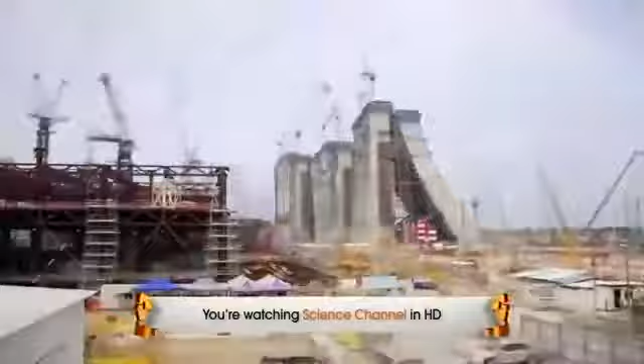Incredible feats of architecture. And right now, I'm going to take you behind the scenes of one of the largest construction projects in all of Asia. Singapore is reinventing itself. This small island nation is attempting to finish one of the most audacious buildings on the planet. It's the country's first casino, 3 skyscrapers covering 9 million square feet, and topped off by an engineering masterpiece, the first ever Sky Park.

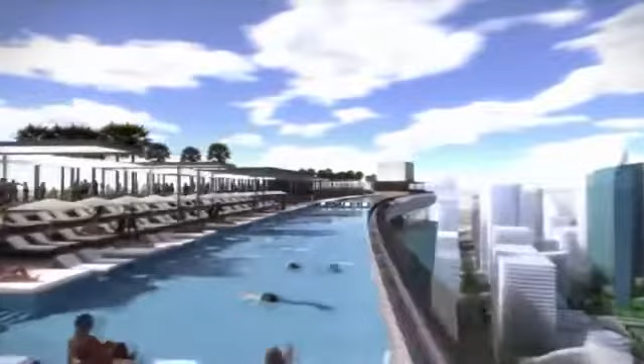Longer than 3 football fields, with gardens, swimming pools, and restaurants, all higher than the Seattle Space Needle. We're actually in the pool right now. We're in the pool. This is the view from the pool. Wow. It's pretty spectacular. That is amazing.

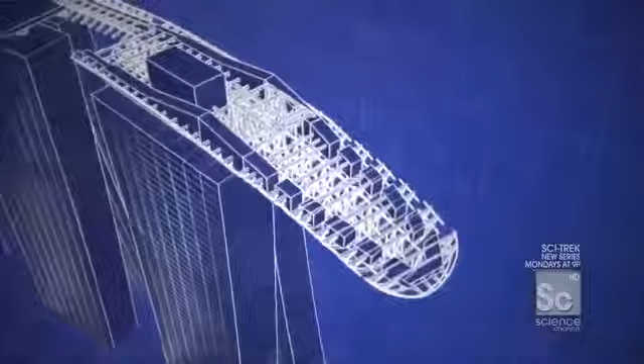To finish it, crews must perform some of the highest and heaviest lifts ever attempted. I mean, you're putting a piece of steelwork the size of an aircraft carrier on top of 3 towers. Tackle one of the largest paint jobs on the planet. You would never do this in America. And erect one of the longest cantilevers in the world, 200 feet out over nothing. Oh my God, that's enormous.

I am in Singapore, a tiny island nation with less than 5 million residents. In fact, the entire country is smaller than all of New York City. Located at the southern tip of the Malay Peninsula in Southeast Asia, the main island of Singapore is both a city and a country, one of the most densely populated in the world.

Culturally speaking, it's a somewhat strict and buttoned-up environment. Chewing gum, against the law. Insensitive behavior is punishable by fine. And if you're caught vandalizing a building, you quite literally get hit with a stick. But despite this conservative cultural backdrop, Singapore is attempting to reinvent its image by doing something totally surprising. They're going to open a massive casino.

With no natural resources of its own, Singapore is risking $5.5 billion in hopes of cashing in on the gambling boom exploding across Asia. It's a pretty significant gamble because for Singapore, you've never had gaming before at this scale. You've never had a resort at this scale. Yes. You're taking a kind of a major leap. Yes, it's certainly a transformational project for Singapore. Where you hope to actually not just double, but triple the tourism receipts. That's big.

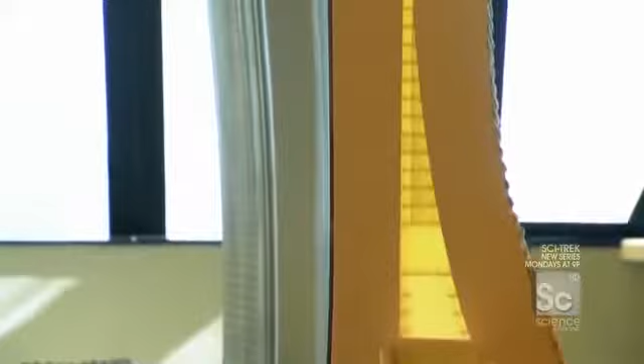The centerpiece of this giant transformation, the Marina Bay Sands. One of the biggest and most expensive casino complexes in the world. Unlike any hotel and casino ever built. Rather than just being a traditional hotel and casino that we might find in Vegas, instead, we have a museum, you have theaters, you have retail, you have a casino, massive convention center, 3 incredible hotels, and all of that capped by the first ever Sky Park. That is absolutely right. The Sky Park on the very top will become the icon of Singapore, we think.

In a move that has never been done before, world-famous architect Moshe Safdie put a park across the top of 3 massive skyscrapers. An 1,100-foot-long urban oasis with tropical gardens and one of the longest swimming pools on Earth. All of it perched 55 stories above the ground.

So, Brendan, how do you describe a Sky Park to people? I mean, it's just a fantastic structure. I've never seen anything like it. There's 3 55-story towers, and you're putting a piece of steelwork the size of an aircraft carrier on top of it. So it's quite a feat. And there's a park up there. There is. Well, there's more than that. There's observation decks and swimming pools and restaurants and all sorts of things. So it'll be a little city in itself.

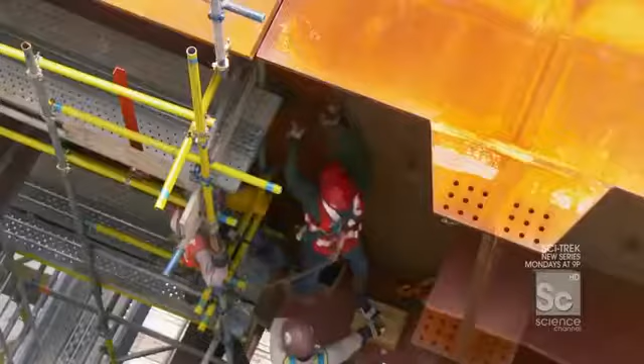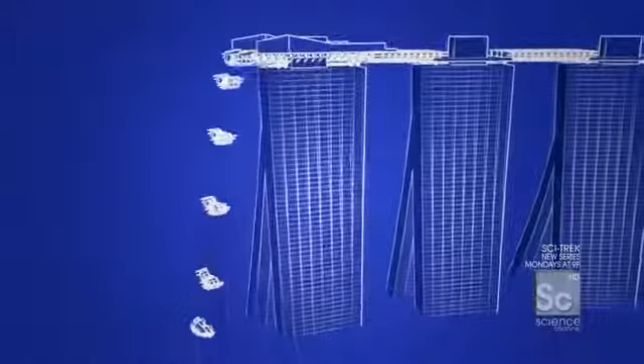The biggest challenge for builders, lifting 7,000 tons of steel, which is more than the main span of the Brooklyn Bridge, on top of 3 650-foot-tall buildings. To get it up there, the team divided the structure into 14 large but more manageable segments. 6 form the bridges connecting the towers, and the other 8 make up the observation deck, which sticks out 218 feet from the end. And right now, crews are about to lift the second-to-last bridge segment, a massive 350-ton piece that will hang between towers 2 and 3.

It's a little after 7 p.m., and on most job sites, it'd be quitting time, right? Folks would be going home. But here in Singapore, we're about to begin one of the most critical lifts in the entire project. That bridge segment right there, an over 356-ton chunk of steel, is about to get lifted up over 650 feet in the air.

In principle, this sounds crazy, right? Yes. We're actually taking a bridge, lifting it up, and putting it on top of 2 skyscrapers. This has never been done. Never done. So you've got to be a little bit nervous to get this thing up. Oh, definitely. We have to get it right.

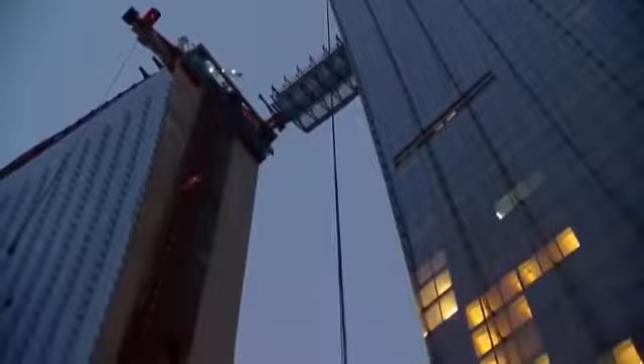Lifting this piece will take some of the strongest hoisting cables ever designed. Going up? All right, Solomon, up here? Yep. They get attached to the very top of the segment, 5 stories up. And now, at long last, I'm on the top of the whole bridge segment, and you really get a sense of its length, because look at that. It spans all the way out between 2 full towers, over 150 feet long.

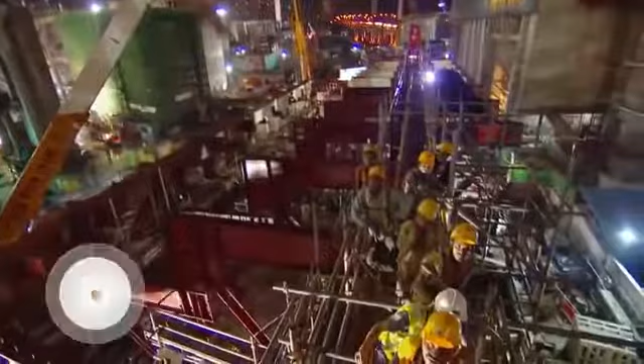And here, this is what it's all about. This is the shackle coming down from over 600 feet up. Come here, check this out. Look at the amount of bound cables inside of this thing. Just the density. There are 2 of these shackles, one on this side, one on that side. We're going to lift up over 350 tons of steel. All right, you call the man upstairs.

An operator from the top of the sky park lowers the shackle down. Here she comes, here it is. Okay, 960 mm. It has to line up within 1/10 of an inch for this 150-pound anchor pin to fit through. Oh no. Stuck. Push. Come on, shake it a little bit. Hammer! Give it to me. Lock here. You ready? Here I come.

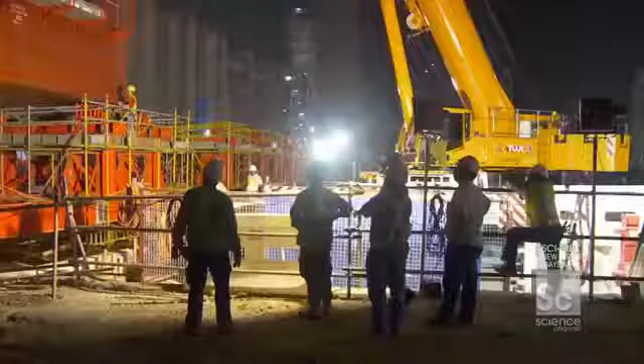Once the pins are pounded into place and the shackles are connected, there is one final step to make sure that the load is secure. Overnight, crews test the connections for 12 hours by hanging the segment just 4 inches above the support. If everything looks good, it is ready to go up. Okay, Solomon, she's floating. 4 inches off the ground. Ready for the lift? Yes.

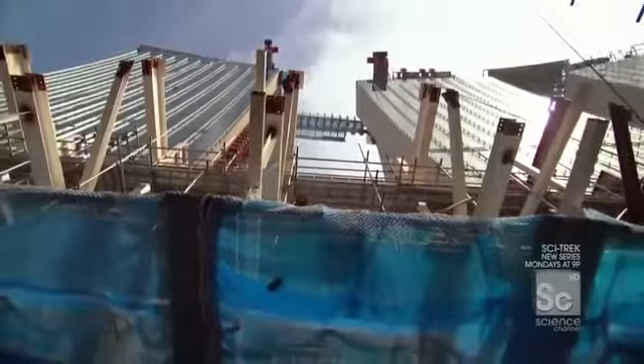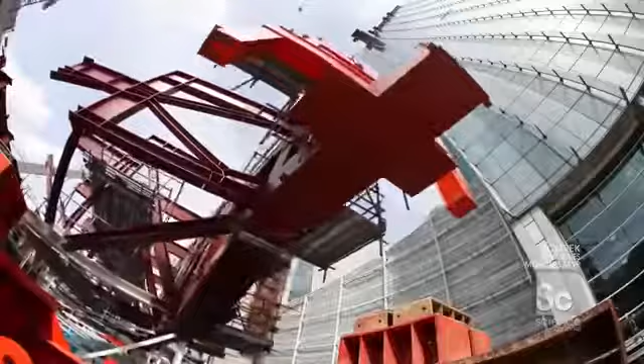How's the wind? If you can see, it is swinging. And if it swings, it might hit the building. So when the lift begins, the concern is, in a strong wind, like a pendulum, it could move and actually hit the building. It's that close to the building? It is very close to the building. Because of the curvature of the towers, this piece must pass within 10 feet of 2 glass skyscrapers on its way up. Any wind over 5 miles per hour is enough to call off the lift. So are we good? Are we ready? Yeah, good. So it's now okay to go.

Typically, crews would use tower cranes for heavy lifts, but this segment far exceeds their capacity. So instead, engineers are borrowing the technology from a different kind of construction: bridge building. Even the most powerful tower crane can lift about 20 tons. This thing weighs over 360, not an option. So they went with something called a strand jack. To understand how it works, imagine 2 hands or clamps holding a rope. One hand locks the rope, the other brings the rope up, grabs the rope, goes back for more, brings up more rope, and so on.

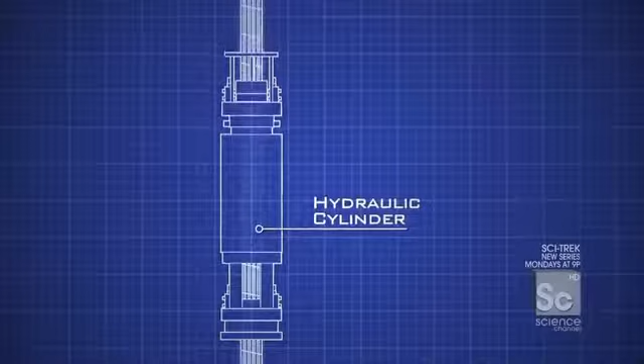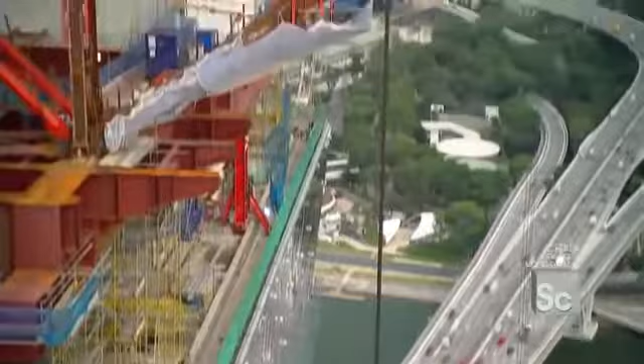Strand jacks work on simple hydraulics. A bundle of 22 half-inch diameter cables passes through 2 clamps. The top clamp grips the strands and moves up almost 2 feet. Then the bottom clamp locks the cables in place while the top moves back down for the next pull-up. It takes 2 enormous strand jacks to lift this segment, one on each tower. Combined, they could lift the Statue of Liberty. It's the first time this technology has been used to make lifts this heavy from the top of a skyscraper.

Tony? Danny. Welcome, Danny. Good to meet you. Tony, where am I standing right now? Well, you're on the Sky Park. So this is where the action is. This is where the pool is. Right where we are now is the second swimming pool. We're actually in the pool right now. This is the view from the pool. Oh my God. People will be able to swim out to the edge of the pool. And literally there'll be no edge, right? It'll be an infinity edge looking out over Singapore. Wow. It's pretty spectacular. That is amazing.

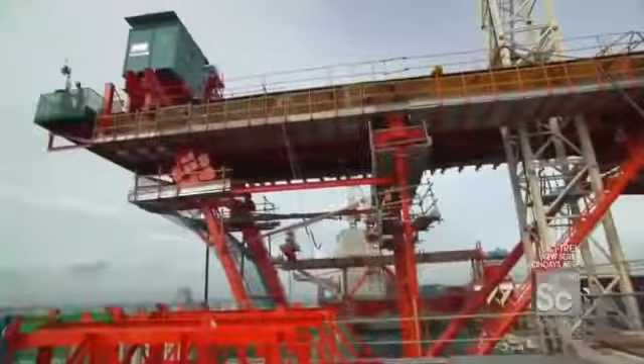And what's making all of this happen is this really nasty looking beam. That's right. This enormous frame is supporting the strand sliding units. Now, can we head up top to the strand jack? Yeah, let's go this way. The strand jack sits on a temporary support structure that extends 30 feet out from the side of the tower. Tony, where we're walking right now, we're actually leaving the skyscraper below us and heading out. We've just walked off the edge of the building.

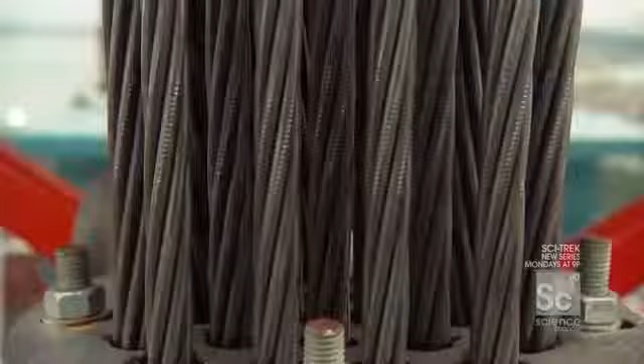Beyond. So we're now standing perched out. There's no more skyscraper below us right now. There's no building below us. It's awkward. It takes almost 30,000 feet of cables to raise the segment, enough to cross the width of Manhattan. And if any of them get tangled, workers cannot lower the piece back down. So one of the most critical jobs on the site falls to the cable manning crew here at the highest point of the sky park.

Okay, so I am now standing at the very top of the strand jack. And you know that because right here, this is it. This is the top of the cables. And what we're about to do, every 30 strokes, they stop everything, clamp the lift, and spray some lubricant inside to make sure everything moves real freely. Unfortunately, I'm getting tasked with that role right now, so what do you got, some WD-40 we're doing this with? Look at this guy. Why is this the most low-tech thing in the world?

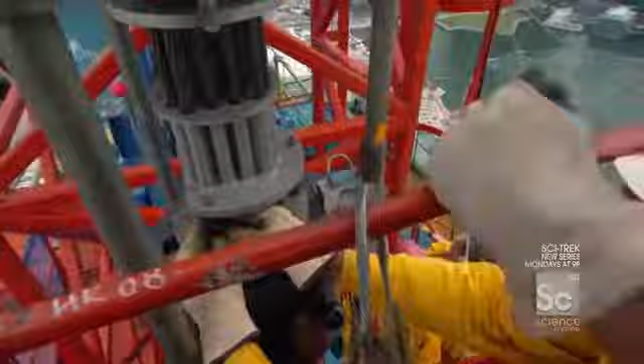Okay, so now what we've done is we've taken the collar off, we've lowered the jack down, now we've exposed the cables to give us good access for some good greasing. Okay, Romley, how do you grease it up? Spray and pull out. Put in, spray, pull out. Go in, spray, pull out.

You know, it's sort of humbling to have to climb up to this point, to have that behind you, to have to take a spray can like this, stick in, spray, pull out. Stick in, spray, pull out. Go in. These guys have to grease these cables once every hour for the entire night to get this segment up the final 500 feet to the very top of the sky park.

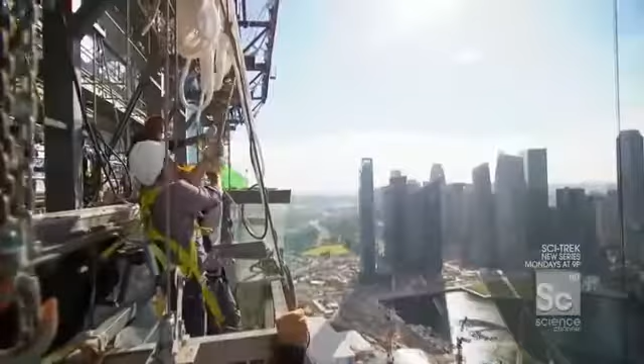Coming up, a one-of-a-kind solution to fight Singapore's intense sun puts up a fight of its own. Hang on. Whoa. I'm gonna pull you right outside of the basket.

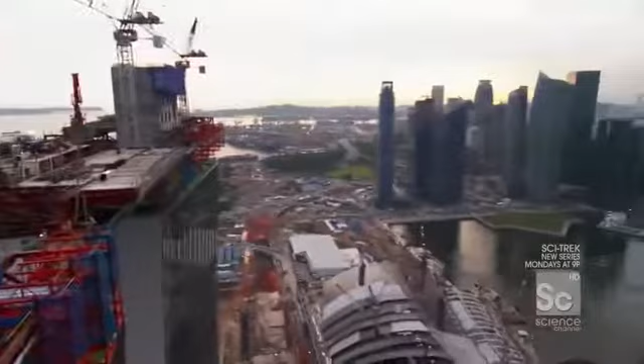Singapore is just 14 miles long. And with literally nowhere else to expand, this tiny island is increasing its footprint by actually filling in the sea, creating almost 1,000 acres of land on which to build an entirely new downtown. So tell me something. If I was standing here 5 years ago, what would I have seen there? Well, 5 years ago, you wouldn't see the floating gallery, you wouldn't see the wheel, you wouldn't see Marina Bay Sands, neither would you see the financial center. So this is a radically different skyline in just 5 years' time.

Yes. Singapore's evolution involved 30 years of land reclamation, followed by 5 years of construction, all culminating with the Marina Bay Sands. So 5 years ago, this would have been called the old downtown of Singapore. Yeah. And now with the Marina Bay Sands completed, this becomes the new downtown. Yes, absolutely. The Marina Bay Sands 3 hotel towers will offer guests phenomenal views of Singapore's new downtown. But they also had to be a stunning centerpiece for the city's redevelopment.

So, to define their curved silhouette, the architect clad the tower facades with 1,900 glass fins, which also perform a key functional role for the building. The western face of the towers gets the most intense afternoon sun, so when the light hits the fins, they actually deflect the sun's rays, casting a shadow that reduces the heat on the hotel rooms by 20%, while still enabling clear views of the bay. But this distinctive design feature is also one of the most difficult to install.

I think today is gonna be one of those days where I go and do something that I kind of think I shouldn't do, but in the name of really understanding how it is they build this building, we're gonna do it anyway. I'm gonna take you in a gondola up the side of a building, almost 600 feet, to install glass fins. And the guys who are gonna help me do it are right here. Terry? Hi, Danny. Good to see you. David, how are you? Danny, good. Not bad. What are we up to, fellas?

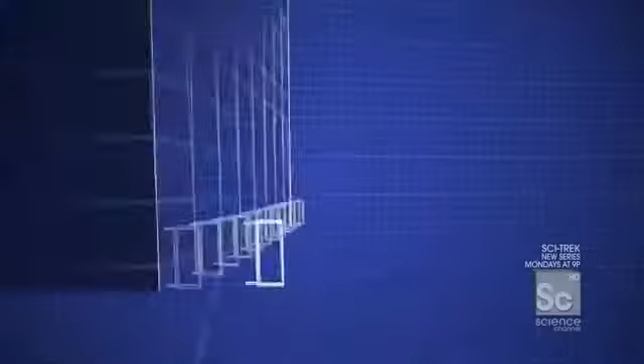We're actually going up to the top. Basically, we're going to install the last fins to Tower 1. And these fins are actually hanging perpendicular from the facade of the building. That's correct. Each fin is 10 feet tall and weighs 400 pounds. They're hung in straight vertical lines, protruding up to 4 feet from the side of the tower. Because the facade actually curves outward 5 degrees at the top, there would not be enough clearance for the Sky Park lift to pass by. So 12 fins in the upper corners of each tower were left off until now.

So this is it. We are closing up the curtain wall of Tower 1. Yes. Big milestone. Big milestone. All right, take me over to my maker. Let's do this. Okay, no problem. Lead the way.

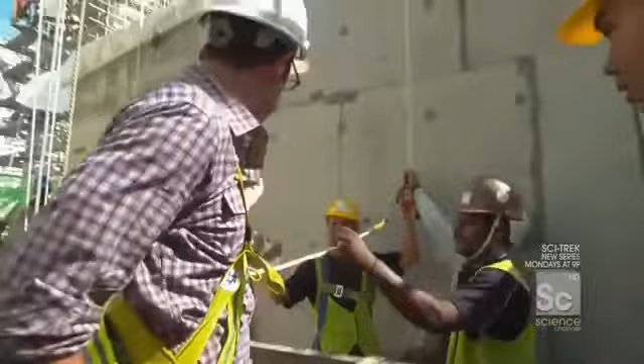Terry's crew installs the fins from a 6-foot-long gondola hanging off the side of the building. Okay. We doing? All right. You gotta be kidding me. It's basically the size of a bathtub, swinging from 2 sets of 650-foot-long cables tied to the tower. Show me the safety, please. It's so precarious that I'm going to be tied to a separate cable in case the main cable fails.

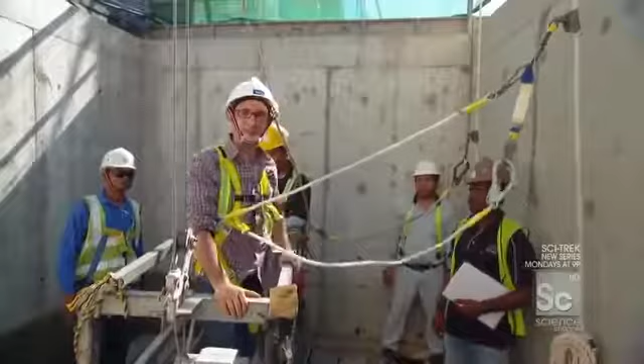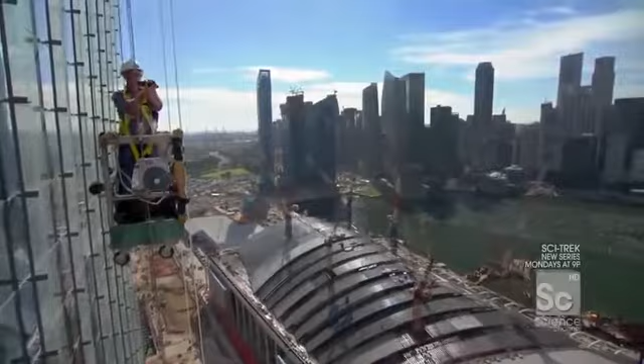Yeah, here we go. The gondola travels at just 0.2 miles per hour. Here I come. Moving along, just moving along. So it'll take me more than a half hour to reach the top. Oh my God. This gondola looks like it was built by the Unabomber. Sometimes I don't really feel like I give you exactly what's going on for me right now, so I want to give you just a little taste of what I'm seeing. There is a fantastic view of Singapore. There is Jay, my chatty friend. And there is not a good situation.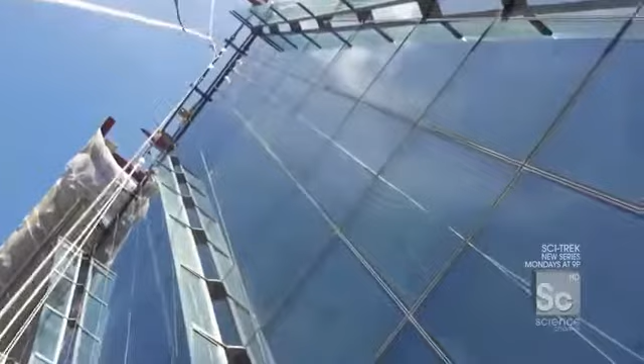All right, we're almost near the top, and you can tell because the building is beginning to bend back on itself and get closer to me. Right there, check it out, we're about 80 feet from the top of the building, and if you look up, you can actually see the missing glass panel. And as I approach the top of the skyscraper, they're prepping the glass. There she is. Oh, the wind is really moving up here.

That looks safe. Hey, fellas! How are you? How are you? Okay. Nice weather, huh? Okay, this is something you don't see every day. I'm outside a skyscraper, and right here, right now, I am touching the top of the building. We are on top of the skyscraper. All right, who's ready to install some fins?

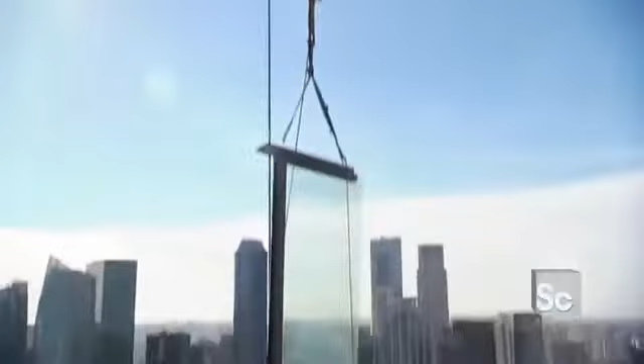Each fin is a custom-built pane of solid glass. I got the line. Hang on. On a calm day, they are extremely difficult to manage. The wind is blowing this thing out. Give me a hand. But on a day with even a light wind, the task is almost impossible. Hang on. You thought it would pull you right outside of the basket. Give me some help. I'm not kidding. Every time you get a little gust of wind, I can feel my feet getting pulled a little bit. There she is, slowing down. It's basically like a big double laminated glass sail. And if the wind catches it, I mean, it moves.

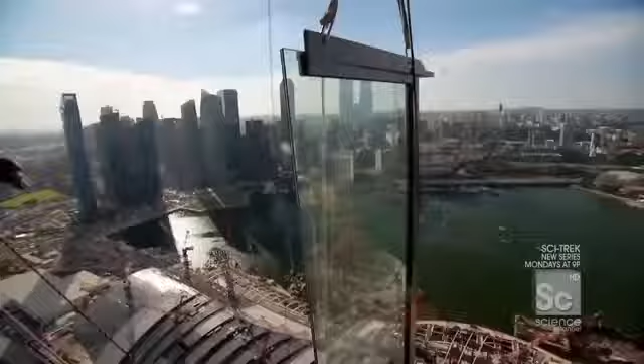Okay, let it come down a little bit more. The fin can swing up to 20 feet while attached to the tower crane. Coming this way. Okay. Watch out. Someone help him. That's just too dangerous for the final installation. So the team has to transfer it to a more precise chain block mid-air. Whoa. Hold that side, please. All right. So this is it. What we're doing right now is essentially taking the load from the crane and transferring it to that chain block. Are we in? Okay, I think we're set.

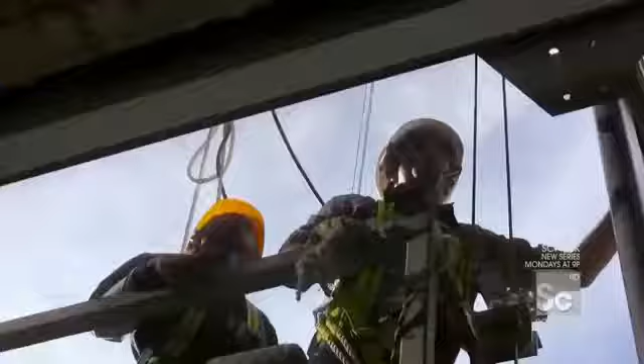This is another one of these moments in my life where I say to myself as an architect, did you really need the fins? Did you have to have fins? Building would have been fine, you know? Okay, gondola down. Yep. The fins are designed to clip into each other at the bottom. Need you now, Jay. But here, at the very top connection on the highest fin, it gets locked to the building with bolts. Oh boy, this is gonna be a nasty one.

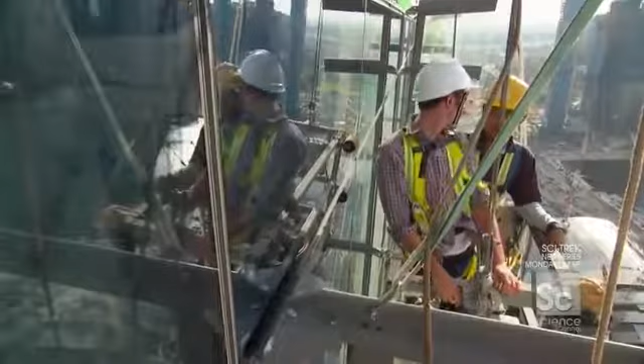Okay, Jay. 4 bolts. Give me your thoughts. 1, 2, 3, 4. Are we good? Come here. Bring it in. Come on. Give me it. There it is. Okay. That's right. Whew. 4 bolts, locked in, lined up. We, Jay, are done. Can we go home? Home. That much he understands. Let's get out of here.

Up next, building one of the longest and highest cantilevers in the world, jutting out more than 200 feet over nothing. Oh my God. That's enormous.

Singapore's new Sky Park is the first of its kind. A steel structure longer than an aircraft carrier, on top of 3 skyscrapers taller than the Seattle Space Needle. And on the northern end, the architect took this innovation one step further, creating the longest cantilevered observation deck in the world. It's the biggest and heaviest section of the Sky Park, and it hangs out 200 feet over thin air.

When it's done, the Sky Park is going to look to the eye like one 1,100-foot-long continuous element. But the reality is, it's actually made up of two very different structural conditions. Bridges on the one hand, and something called a cantilever on the other. Spanning between towers 1 and 2 and towers 2 and 3 are two bridges, basically acting like tabletops. The force goes from the bridge, transfers into the towers, and down something called shear walls into the foundation.

Now, the cantilever is a different story. A cantilever, by definition, is a load supported on only one side. So what you have here is a 218-foot-long span, almost like a diving board, perched out over nothing. Intuitively, that load wants to just twist off the building. So to keep it down, they've put not one, but two 700-ton backspans holding down the cantilever. The two backspans weigh as much as a fully loaded freight train.

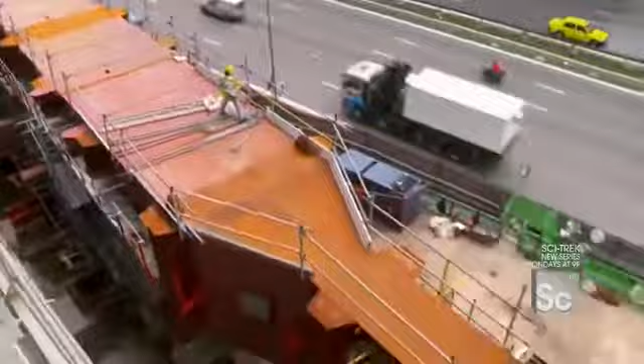But that weight is critical to balancing out the cantilever, which will jut out longer than a 747 from the end of Tower 3. There are 860 tons of structural steel that make up the 218-foot-long enormous cantilever. It is so big that they actually assemble the entire unit here on the ground before sending it all the way up there. The cantilever is just too big to be raised in one single lift.

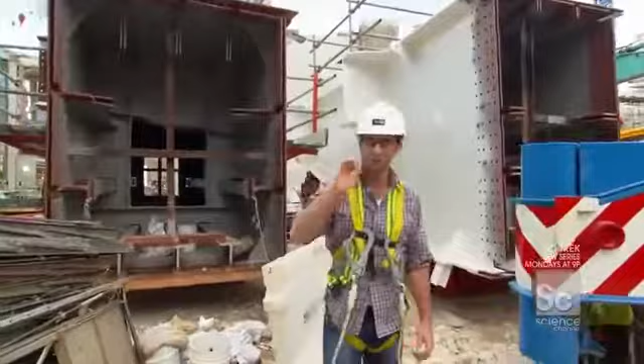Instead, it's divided into 6 segments. Once they're 650 feet in the air, crews will have just one shot to fit them together. So before the segments can be lifted, they're assembled on the ground to be sure that each connection will fit perfectly. So these pieces behind me represent the very final pieces of the cantilever to be assembled here on the ground. So once we get this and this bolted onto that massive cantilever, the lifts can begin.

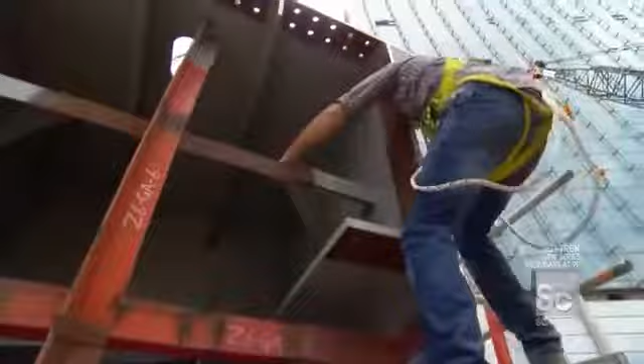So the crane's now setting the shackles up. We're going to go on top of the piece to connect it. The piece we're attaching today is 12 feet tall. Come on, jungle gym style, baby. And it weighs 30 tons, as much as 2 Mack trucks. A crane will lift it over to the rest of the cantilever using 4 extra large shackles.

So Viram's now tightening up this shackle. So shackle number 1, 2, 3, and 4 are all connected. The next step is to take the piece that I'm standing on, lift it up, and extend that cantilever another 50 feet.

You ready? Knuckles? Knuckles! All right. You ready, Knuckle Man? Knuckle Monster, you got it. Nux Magoo, come over here for that. Bang! We are ready to go. Okay, I'm ready.

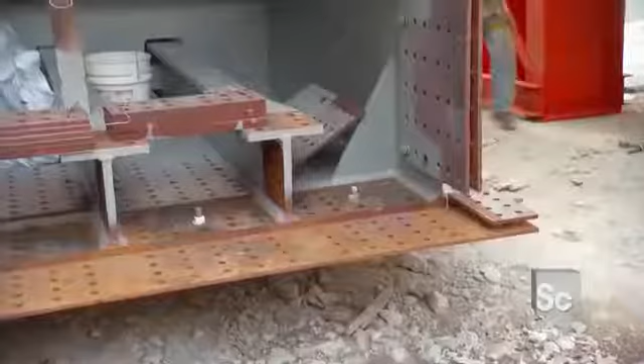So what they've done is they've just put a bit of tension in the line, lift the piece just off the ground to make sure the shackles look nice, and they know where the center of gravity is. So are we good? Are we ready? Yeah. All right, let's go. She's off. Out of our hands. Now the crane's got her. He's going to swing her all the way around this way.

What's really worth noting is as you look at this thing, this massive floating piece of steel, it's but a small fraction of the entire cantilever that's going up there. Even with 1.5 million pounds of steel, this cantilever will still be susceptible to the problem facing all structures: movement. All buildings, all bridges, even all cantilevers have a natural frequency, meaning they move ever so slightly.

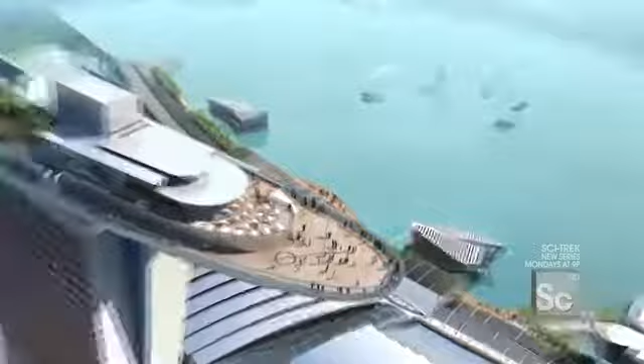Now, if the movement of wind, or the movement of people even, starts to align with that building's movement, it can combine and collaborate and literally shake a building. So when the engineers were designing the cantilever, they had to be concerned with not just how many people stood on the edge, but also how they were moving. This cantilever has been designed to withstand wind and earthquakes, but its most dangerous threat could come at the hands of a DJ. Yeah, it's thousands of tons of structure up there, so you and me jumping about is not going to do very much.

But if you get 100, 200 people all jumping up and down at the same frequency, then it can actually excite the cantilever and you actually start to feel it. Right. It would take hundreds of people dancing to the exact same motion. Yes. Like the Macarena. Yes, that's right. And believe it or not, our dynamics engineers have iPods with thousands of songs in them. No way. That actually have the frequencies of all of these songs.

So, once we actually find out what the frequency is, in theory, you can say you can dance the Macarena, but you can't dance the bus stop or whatever. That can't be true. Is that true? Yeah, that's right. So you're telling me that some engineer is doing intense load calculations and solving the fact that this thing can take the electric slide, but it cannot take the achy breaky heart. And they know that in advance and it's been designed.

More or less, yeah. Imagine the party, like the party's going great, a big wedding, and all of a sudden someone puts on the Macarena and is like, no!

Now that the piece has made its way over to the rest of the cantilever, the next major challenge is lining this giant segment up for attachment. So the piece is now literally sitting right on top of my head. And just imagine, on top of this incredible white long piece of steel will soon be a garden, a pool, and a dance party.

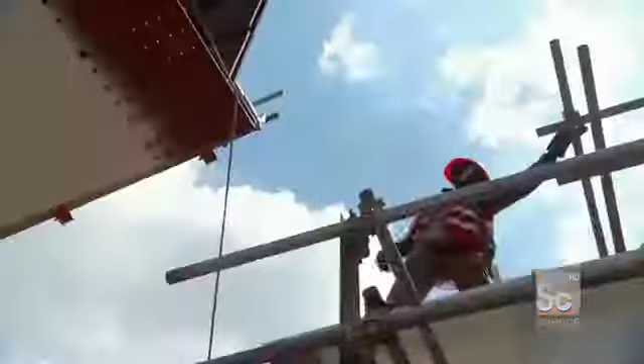Slowly guide it down. The thing incredible about lifts like these is that the first 99% happens almost instantly, and now it gets down to the details. Pushing it, pulling it a matter of inches, get all of these holes lined up, to get the bolts in, and take the load off the crane.

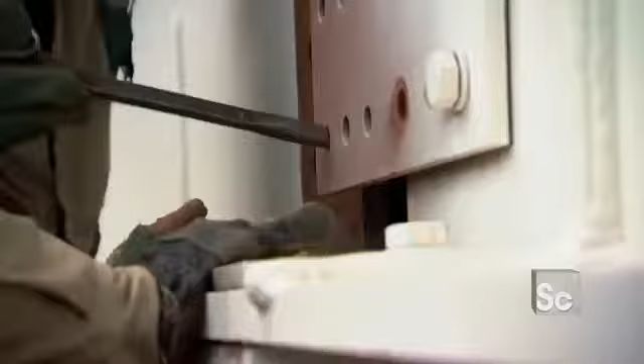Once the piece is in place, the crews have to line up all 1,500 bolt holes. There are so many bolt holes. They'll connect about a third of them here on the ground to make sure everything fits together before liftoff. Because there are no second chances once this piece is airborne. So this is how one fits into the next piece right here. You have these two plates on top, and they're sliding over top of the previous cantilever piece.

Here it is, it's coming in, it's coming in. Once she's there, we'll put this pin in to lock the piece together so we can release the crane and move on. About 2 inches. Just about there, just about there. Okay? Yeah. Use the hammer. The pin secures this new piece to the rest of the cantilever, so bolting can begin.

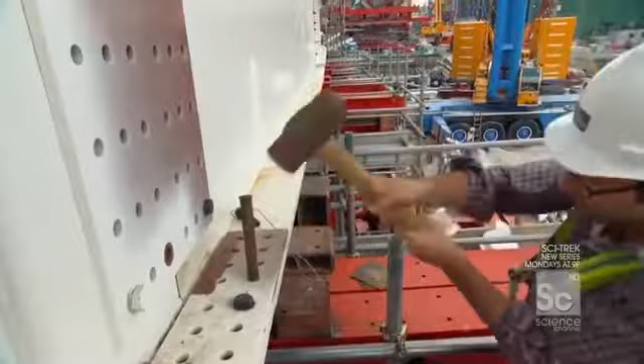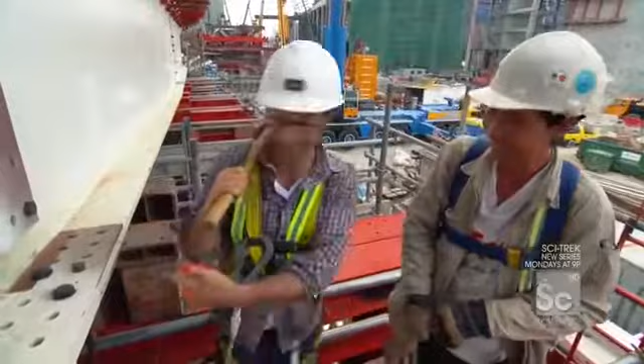I hit it every time. Yeah. I never hit it every time, man. I never do that. Usually I like break a finger and knock some steel off the thing and almost break the hammer most of the time. I knocked the crap out of that thing.

Well, as you can see, the piece is in its final location. And now from where I'm standing, I think you can really get what this thing is. An 860-ton, 218-foot-long steel diving board that's going to be perched out over 600 feet in the air.

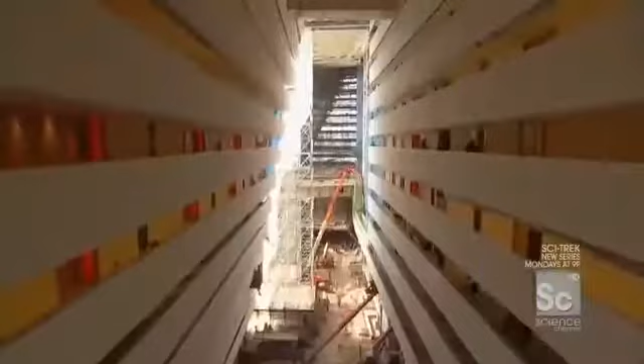And coming up, a hotel like no other, with a lobby bigger than a cruise ship wrapped in glass. This is probably one of the most spectacular corridors I've ever seen. But first, what is the maximum number of people the Sky Park can safely hold at one time? The answer after the break. The answer to the trivia question. 3,900 people can safely be on top of the Sky Park, but only 900 of them can be on the cantilever.

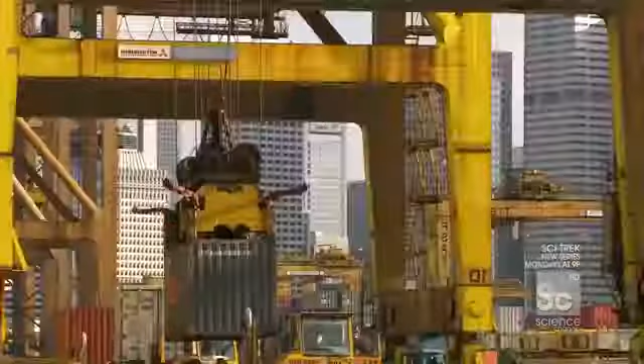Singapore is the gateway to Southeast Asia. And for the past century, its economy has depended on its location as one of the world's busiest shipping ports. But this city is in the midst of a makeover. When the Marina Bay Sands opens later this year, Singapore will instantly become one of the largest gaming markets in the world, putting it in the same league as Las Vegas, Atlantic City, and Macau.

When Macau opened their casinos, they looked to the past for inspiration. You have the Venetian in Las Vegas, you have the Venetian in Macau. Carbon copy, only bigger. But here in Singapore, a country so focused on image, they didn't want to mimic what came before them, but instead, they're trying to literally reinvent the idea of a hotel casino.

The difference comes down to design. The typical casino model involves a giant gaming floor with a flashy attraction out front and a hotel connected in the back. But with the Marina Bay Sands, the architect actually separated the hotel from the casino and relocated the attraction on top in the form of a sky park.

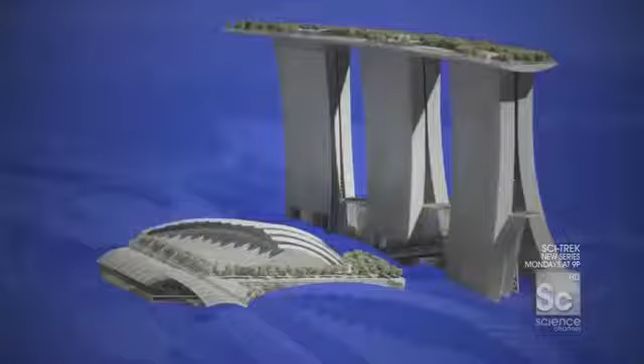From my perspective, when I think about a hotel and a casino, I think of a ginormous casino, a tall hotel in the back, and basically not being able to check in and go to my room without passing a blackjack table or a slot machine. This doesn't follow that model.

It does not. Singapore has a very particular vision as to how they want the gaming component to work. What we built here was not something that was casino focused. It was all of this. So the casino is part of something far grander. And key to making that happen is not just building a set of normal, typical expected structures, but instead to do something like that. Correct.

This revolutionary design carries over to the hotel towers themselves. To create a hotel lobby like nothing before, the architect actually split each building apart for the bottom floors, creating one long tapered space linking the three separate towers together. The three hotel towers are all connected by one long continuous atrium. And that atrium is covered in glass.

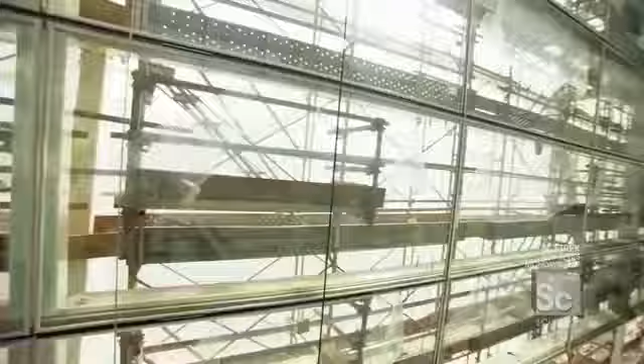These massive 9-foot-long panels that we're about to take from down here and install right up there. 3,500 individual panels will hang throughout the atrium, transforming this space into one 850-foot-long tube of daylight. So, Terry, once the scaffolding comes down behind that glass, this whole chamber is going to be just awash in light. Yes, that's correct. And these spaces literally link all 3 hotel towers and let you look from one end of the building all the way down to the far end.

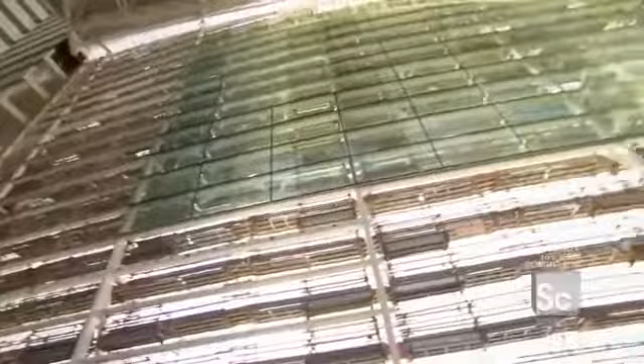That's correct. So this is more than just a kind of connective hallway from one hotel to the next. It's not just a corridor. This is not a corridor. No. And if it is, it's probably one of the most spectacular corridors I've ever seen. Correct. The atrium glass is a key part of the tower design, but it also plays an important functional role in sealing up the building.

With hotel guests arriving in just 6 months, the delicate job of hanging all that glass needs to happen quickly. Now, why is it so important to get the glass on the atrium and button up the facade? The vital bit is we actually have to make the building watertight as quickly as possible to enable all the final finishes to commence on the inside. So all the sheetrocking, carpeting, wallpaper, painting, that sort of stuff can't happen if moisture can still penetrate the building.

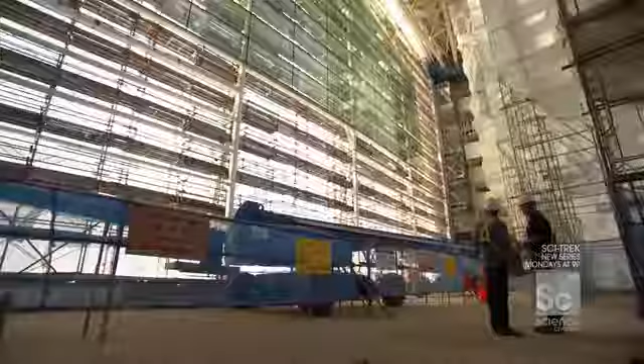That's correct, yes. So today we're going to be headed, where, up there? We're going up to the top and we'll be installing the top piece of the glass. So we have a big task ahead of us. To finish the atrium on schedule, Terry's team has to install 200 panels a day, about 5 every half hour. So here the guys are, they're just getting the glass ready. A task requiring 8 international teams of glazing specialists. Hello, sir. I'm Danny.

I'm Y. Y? Nice to meet you. Nice to meet you. So Y, you're one of the installers? Yes. And you've been installing glass how long? Over 10 years. My experience is over 10 years. Your experience is over 10 years. Yeah. My experience is almost 10 minutes. 10 minutes. So this is going to be a very good team. You and me together. Master and apprentice. Are you ready? Yeah, I am ready. Let's do this. Let's hang some glass. Y and Danny. Why? Because we said so.

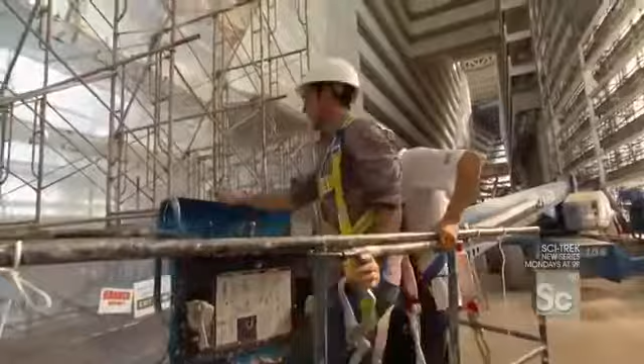Let's do it, Y. We're installing the 3rd highest panel in this section of the atrium, more than 100 feet from the ground. Safety harness? I want you to be safe the whole time. In addition to Y and me, it'll take 10 other workers to install this 550-pound panel. The crew on the ground applies suction cups to the glass and then sends it up on an electric hoist to meet the crew in the air. Here it comes, check it out.

And waiting for me, hello, my brothers! You guys ready to rock and roll with myself and Y? Ready? The big team. This is it. This is the Singapore Glass Stallions.

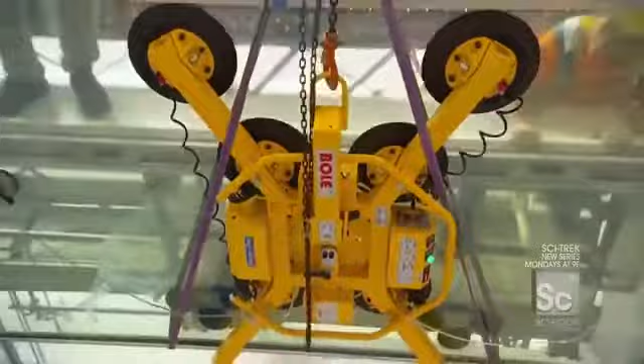All right, here it comes. It's a big piece of glass, huh? Y, what are we doing? What's the first step? The first step is we need to take off the handle. So I'll take off that side, you take off that side? Yeah, take off only the handle. Turn only. All right, I don't want to drop it though.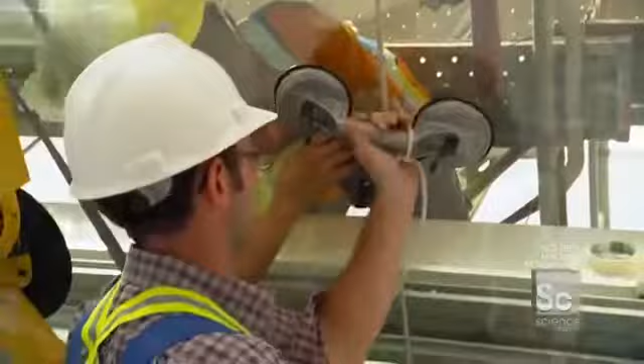Don't want to drop it. Okay. The panel is supported by a backup system of smaller suction cups to help guide the piece on its way. Okay. Oh, okay. Yeah, okay, guys. It's okay. Let go? No, it's too scary. I'm not going to do it.

Okay, I did it. 我坐上去啊。 And just like the glass fins outside of the towers, we'll finish maneuvering this panel into place with the chain block. Yeah, okay, guys. Okay, so the chain block has lifted the glass panel to just about the height, as you can see, of the previous panel. So the next step is to push it in and get it locked into place on the brackets. Okay, why? Should we bring her in?

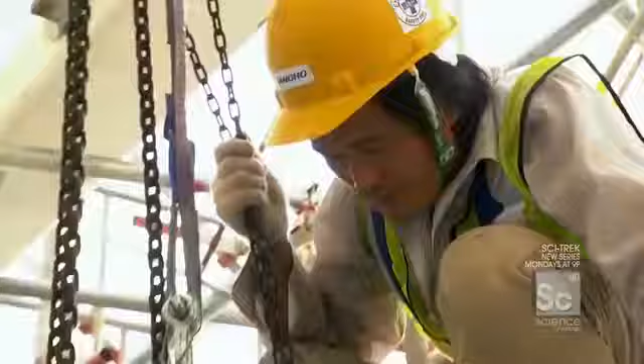Yeah. The interior work for the hotel cannot get started until all the atrium glass is hung and the lobby is watertight. I'm pushing, why? So to speed up that process, 20 attachment brackets come pre-installed on the atrium wall frame. They sit horizontally so the glass can slide into place. There we go. And then we'll turn them vertically to lock the panel to the building.

Do I need the screwdriver? No, you use the power tools. I'm old school, why? Power tools. I'm old school. You make sure all the pressure bar must be tight because the hand power is not standard. You haven't seen my hand power, why? Yeah, hand power. Tight, yo. Check it, why? If you don't trust me, check it. You have a look. That's just good stuff.

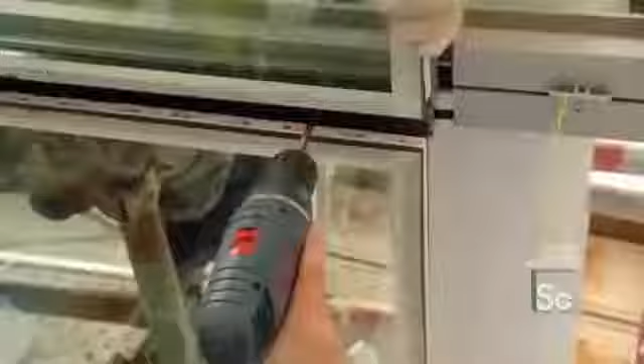Yeah, good. Very good. All right, so all 4 sides are locked into place, and this glass panel is now fully supported by the building. So therefore, why, I'm pulling the plug. Suction is coming off. 3, 2, 1. Okay. All right. Very nice. Yeah. Look at that. Nice, huh? Very nice.

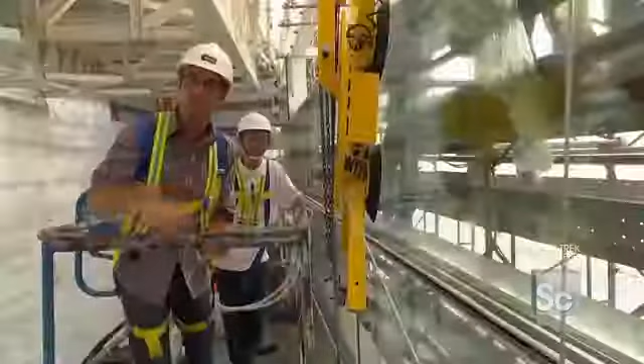Why from Malaysia? Yeah. And his team do this 25 times a day. Best partner. And in just 6 months' time, this entire atrium will be covered in glass and shimmering with natural daylight. Okay, it's you and me. Go home. Now, go home. And by go home, I mean hang glass the rest of the day.

Up next, racing to finish one of the largest paint jobs in the world. We're gonna use a brush. Yeah, brush. This brush. After 30 years, Singapore's ambitious downtown redevelopment is nearly complete. Its crown jewel, the $5.5 billion Marina Bay Sands, is due to open in just 6 months. And crews are racing to complete the hotel's complex facade. The glass on the face of the towers is complete, but on the side walls, the concrete remains exposed. So to finish those walls on time, there's another massive job ahead.

When you clad the outside of a skyscraper, typically you cover it in maybe some stone veneer, maybe some glass, or maybe some metal paneling. What you don't do is you don't paint it, right? Because if you've ever painted a fence, every couple of years you have to repaint that fence. But here in Singapore, they're so focused on things being clean, so focused on the immaculate maintenance, they're willing to actually paint their buildings. So today, I'm going to do something that you would never see on an American construction site. I'm going to paint a skyscraper.

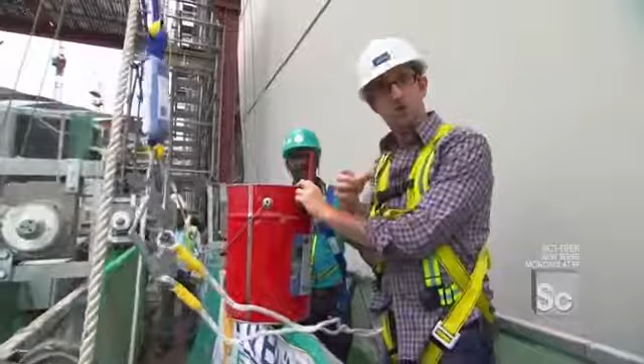Crews will have to paint an area about the size of Mount Rushmore. Muti, I'm Danny. This is going to be one of the single largest paint jobs ever attempted. So I got a bucket of paint, and in order to apply the sophisticated skim coat with the technology, we're going to use a paintbrush. Really, Muti? Yeah, this brush. It's a small brush, yeah? Small brush. One small brush. Right, and obviously you couldn't do a skyscraper with that little brush. That'd be crazy. So instead, I have a roller, which ought to really expedite the process. Painting fast. All right, well, what more do you need? Muti, yeah. Away we go. Okay.

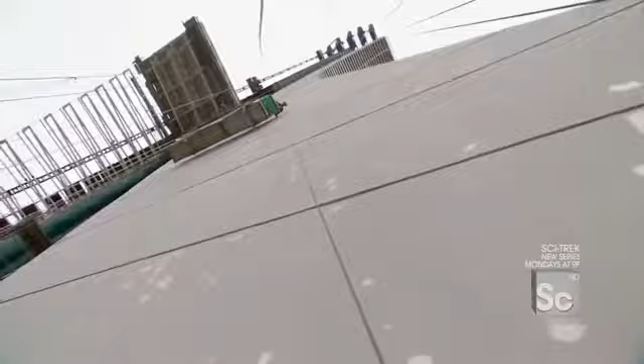This wall faces the country's main highway, connecting the airport to downtown. So, Muti, you're okay? Heights, no problem? No problem, no problem. And on opening day, with all eyes on Singapore, it's gotta look good. Yeah, okay, so welcome to House Painting 101, Skyscraper Edition.

So we're about 200 or so feet in the air. We've reached our cruising altitude in a super, super robust and technologically sophisticated gondola system. And what we have to do is fix this. This wall is a mess, right? Little holes they've patched and filled. We have to have one smooth surface ready to be seen by all of Singapore. Muti, start with the dark gray first, huh?

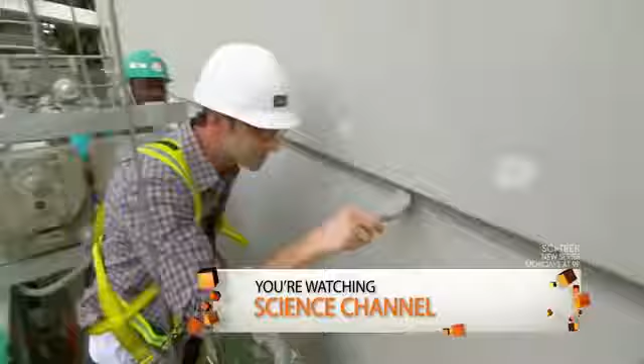Okay, first, I'm gonna paint within the lines here. The dark gray lines mark each floor of the tower, so you can still see the floor-to-floor separation from afar, giving a sense of scale to this massive surface. Okay, so now that the gray line has been deepened and darkened, we're gonna start painting the building.

And this project cannot afford delays, because every month the casino is not open, developers give up $100 million in lost revenue. So these crews have been running at top speed since day one. So, John, just to put this in perspective for someone who's not used to seeing a project this size, it would take perhaps another country a project this big, this expensive, this complex, as much as 6+ years to build. Yep. And you guys are on target to complete this in 3 years, half the time.

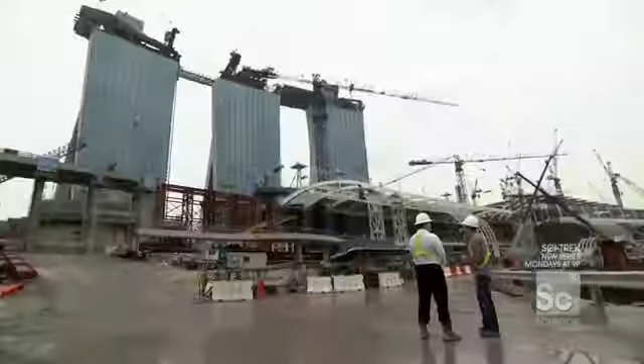Yep. And one of the critical aspects of this project at the moment is getting that Sky Park structure up. So getting the superstructure of that Sky Park done is key to kind of closing up this project and finishing this race. Yep. But this is going to be a sprint to the finish, because crews up at the top of the Sky Park have only 6 months left to turn this mess of steel into the world's longest elevated pool deck. This is it. This will be the pool deck, and that will be the pool.

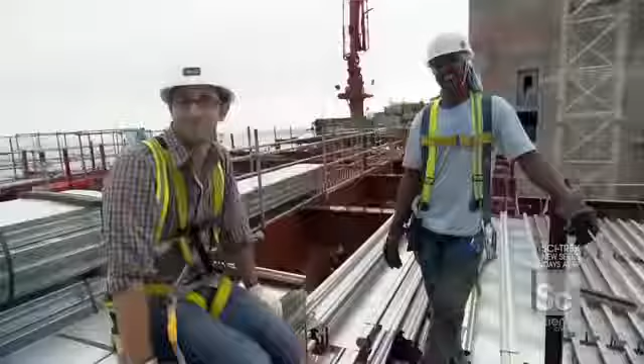But there's a problem. I mean, there's a pretty big problem. You go on vacation, you come to the Sky Park, you see this amazing view of Singapore, and then you fall through a hole to your death. It's not good. Not good fun on the vacation. So Wilson and I are going to cover it with this aluminum decking. Cover the holes? Good. Let's cover the holes, my friend. We're filling in the bridge segments between towers 1 and 2 more than 650 feet up. And there is literally nothing below us but the decking we're about to lay.

Oh, I just got that thing. That thing, I just looked down and I saw a car and it was so little and my body was like, wait a minute, what are you doing up there?

All right, Wilson, how do we begin? Step 1? Yeah, step 1. Okay, you ready? 1, 2, 3. Okay. And stroke in. Yep. Pull back. Pull back. Okay, good. Put the clip. Put the clip on. Nice. Wilson, next piece. Plugging up the hole. Dear God. Okay, letting go. Woo! With these 10 panels in place, another 125 square foot section of this Sky Park deck is complete.

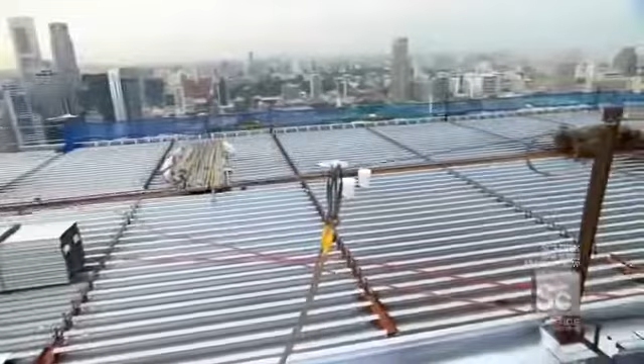Last piece, huh? Wilson and the rest of the crew will have to lay down 300 panels a day in order to have the entire Sky Park ready for opening day. Wilson, victory! Wilson, when the Sky Park is done, people will be swimming right there, dancing on that cantilever, having dinner in that restaurant. Correct. Yes. But we're not done yet, are we? Come back in 6 months, check out this Sky Park.

Me and Wilson will be having a cocktail and enjoying this ridiculous, incredible view. You're buying though, right? Yeah, correct. All right, cool. Wilson's buying, so it's all good.

When the Sky Park is complete and the Marina Bay Sands opens, Singapore will join the ranks of the world's top gaming destinations and fulfill a 3-decade-long quest to reinvent a nation. You know, for me, the moment when a building actually becomes a piece of architecture is when it transcends its function. So what I mean is, think of the Empire State Building. It's not just about the people who work inside of it, but it's really about the spirit of New York City.

The Marina Bay Sands is a project with a hotel and a convention center and a casino. But in reality, the sum is greater than the individual parts. This is a project where an architect, an engineer, an owner, and a government have all come together to literally try and reinvent the face of a nation. And I think if you come back here in about a year's time,